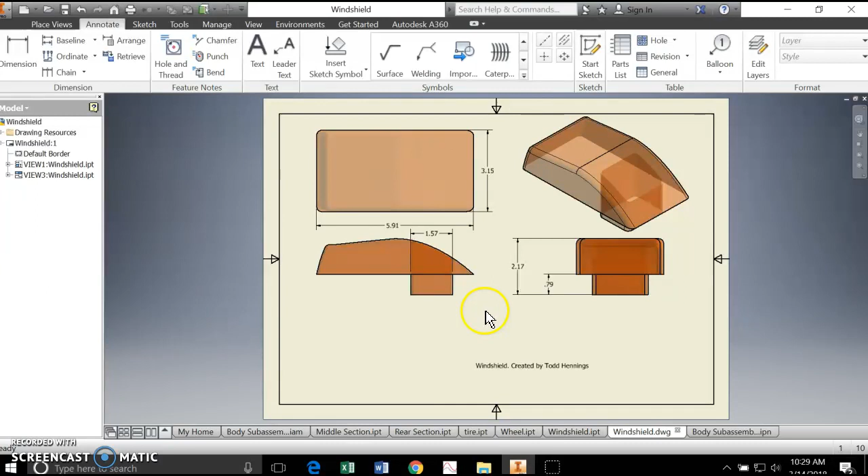All right, ladies and gents, a video for us to figure out how we're going to go ahead and make something that looks like this. This is an orthographic projection, but we're using for the first time in our class the drawing feature in Inventor. So let's figure out how we're going to do that.

You're going to produce an orthographic projection for one of the objects that you made. Maybe I'll model one of my passenger sections and show you how simple it is. So once the part is made and it's in our project file, we're going to choose for the first time the drawing. So I'm going to pull that up here.

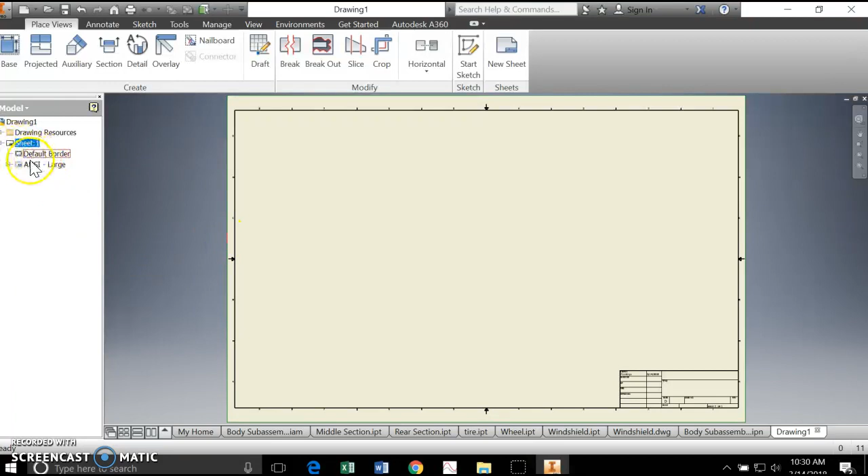We need to make a couple modifications, because a lot of times the way you'd print these out or display them would be for a big printer in different formats. So the first thing I'm going to do is turn it to a printable size sheet. I'll go ahead and delete the title block there, and we're going to put our own in there. The other thing is edit sheet, and I'm simply going to turn it from D to A, that's your standard printer paper. We hit OK, and it gives that.

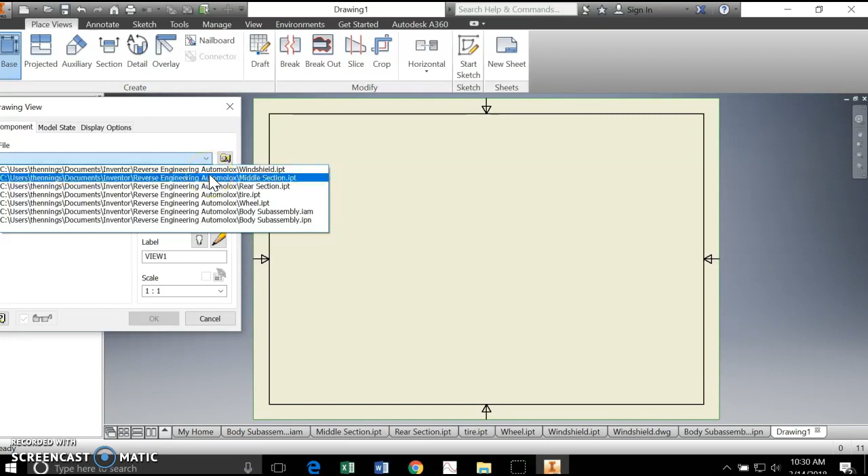Now the first thing I'm going to do is place my object that I'm going to make the orthographic projection of. Like I said, I want to use one of my passenger sections as an example. So I hit base, and down here this drop-down menu has all of the files I've made in that project folder — again, one of the reasons the project folder is so important. I'm going to go ahead and do the middle section, hit that, and it brings it right there.

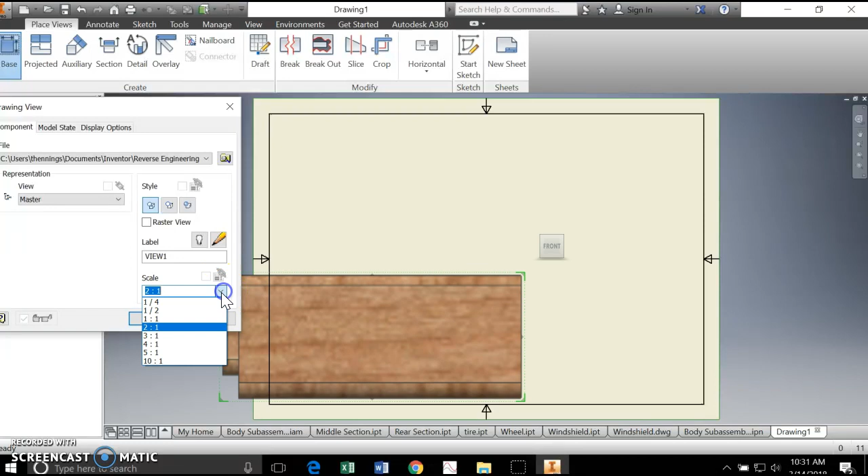I can move that around, but I don't need to move it around. Here, what if it seems too big or too small? I can change the scale in this case. So that's too big, right? That's too small, and you can set it manually — you can set different scales. I think 1:1 is going to be fine for this. So I'm going to hit OK.

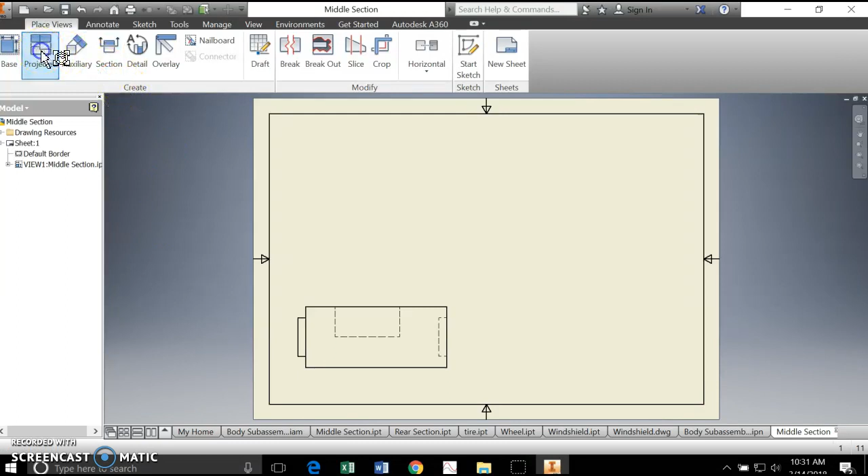Now here's the cool part of it. It changed the view, and we can make those look different in different ways, and we'll look at that in a moment. But we want to get the other views, right — the top, the isometric, and the side. Watch how simple it is. I'm going to hit projected and do this and move it up. So there's a top view, there's my isometric view, click, move it down, there's my side view — see how they're all aligned. Once I have them where I want, I'm going to right click and say create.

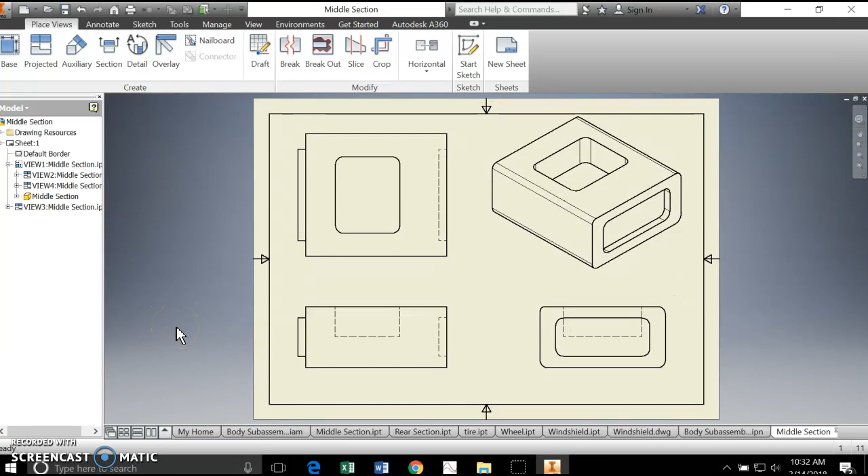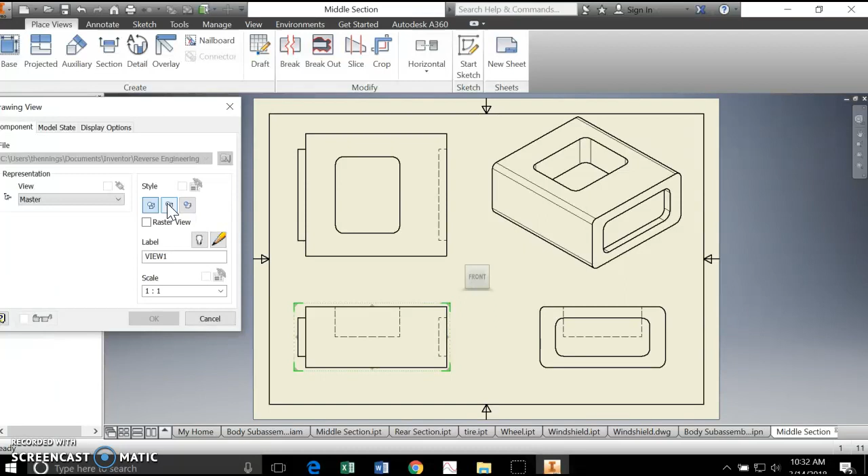So there they are. In this case, the view is sort of like a drawing. If we wanted a more realistic view, I could right click on my front view and look for edit view, and over here gives me some different options. Hidden lines — if I don't want the hidden lines to show, I'd select the one that says hidden lines removed. They're not too busy in this case, I don't think it's really detracting, but if you had a bunch of them it might be too hard to interpret, so I'll leave them there. This one says shaded, so I'll hit shaded and see what that does — it puts in that wood grain shape for us. I'm going to let you decide how you want to display yours.

I could do the same thing up here, edit view and shaded, okay, and it's going to produce that.

How will I know it's yours?

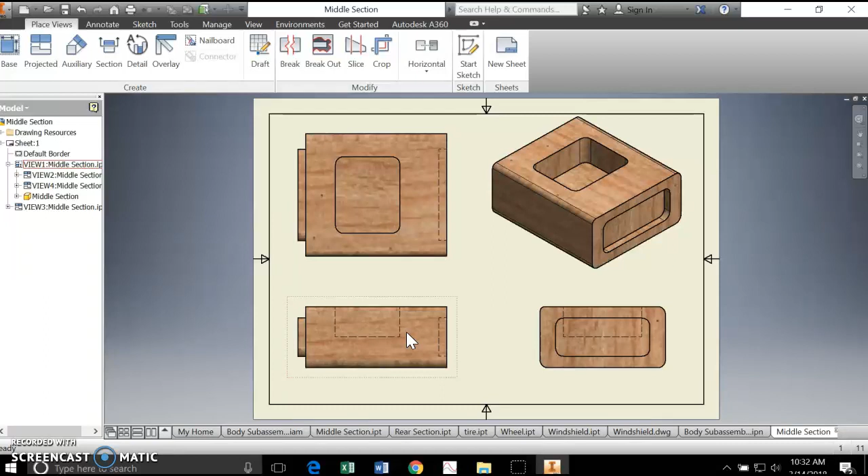We deleted the title block because it takes up a lot of room. We can customize that title block, but for right now I just want you to go ahead and use some text. So under Annotate, I'm going to hit text, and I want you to put something on that looks like this. I'm going to label the part.

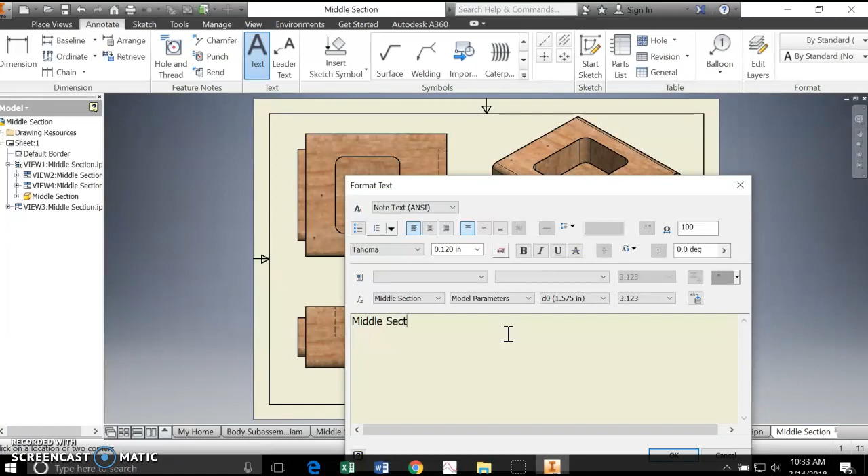And mine was an Automoblox. I forget the car, what was this one? C9? No, it's not C9. Anyway, I don't know, maybe it's T9. You figure out what yours is.

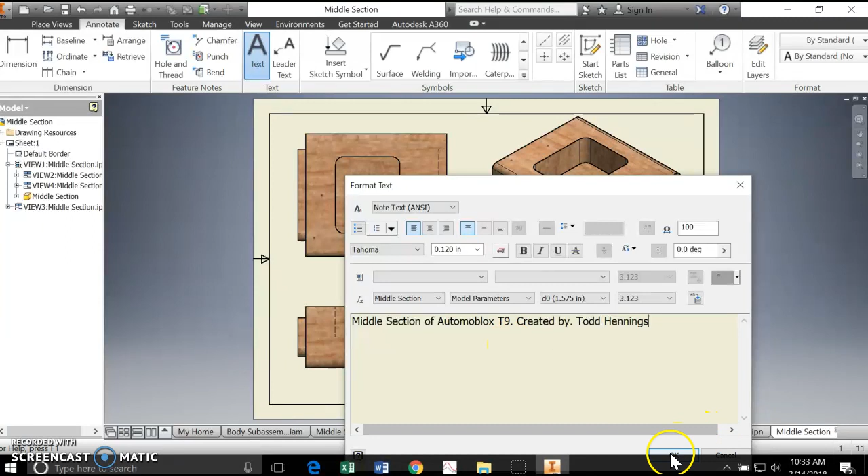And then I want you to also say who it was created by. And we'll hit there, all right. So again, we got a real quick one.

Now we're going to add a couple more things to it, though. I want to put some very basic dimensions so we figure out how to start using that tool. Remember, at the very beginning of the year, we learned the rules for dimensioning. So watch how simple it is.

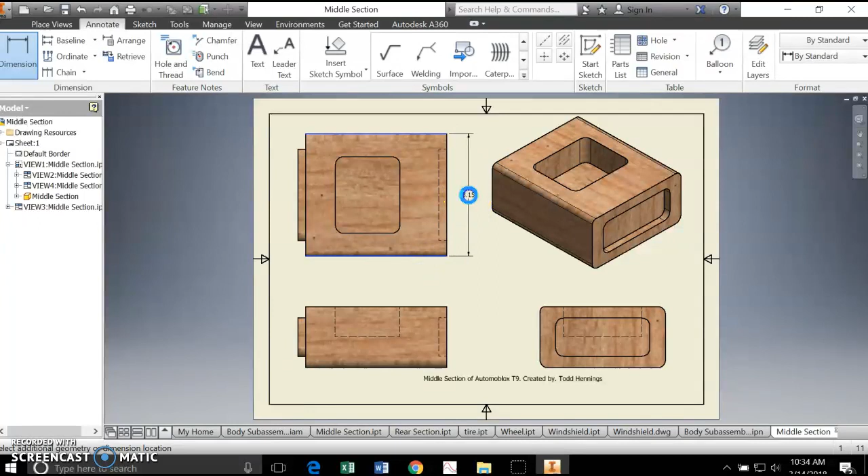We don't even have to go back to our drawings or anything like that. I'm going to hit dimension and just lay some out here. So this would be an important one for someone to know. Just click that. Mine's in inches, so 3.15. I'll hit OK for that.

What's another maybe important dimension that should be on here? Maybe I'll move this one. Cancel, it's kind of hard, you want to grab that guy. I keep doing the same thing. I'll leave it there, I'll show you. I want to pull that one out, and we can pull it out. I'm just not grabbing it right. I'll do another one here.

Dimension, what would be another one that might be appropriate? This one and this one to there. Okay, right. I could do here to here, but that's a hidden line. Remember, one of the rules is we typically don't dimension to hidden lines. So another dimension for this part, here to here.

I'll pull it down here instead of putting it up here, we try to avoid that. And what if another dimension we might put in this case, another one that's important, here to here. Hit OK. And then, of course, maybe here to here.

So again, this is not a tutorial on proper dimensioning and things like that. We'll get into more of these and the specifics in the next unit. I just want to show you how to use the tool. You should have the basic dimensions of these guys down.

Hit OK, I'm going to pull that one out a little bit. Maybe this is an important dimension too that I need to put on there. So I'll do it. Right, there it is. And again, all mine are in inches.

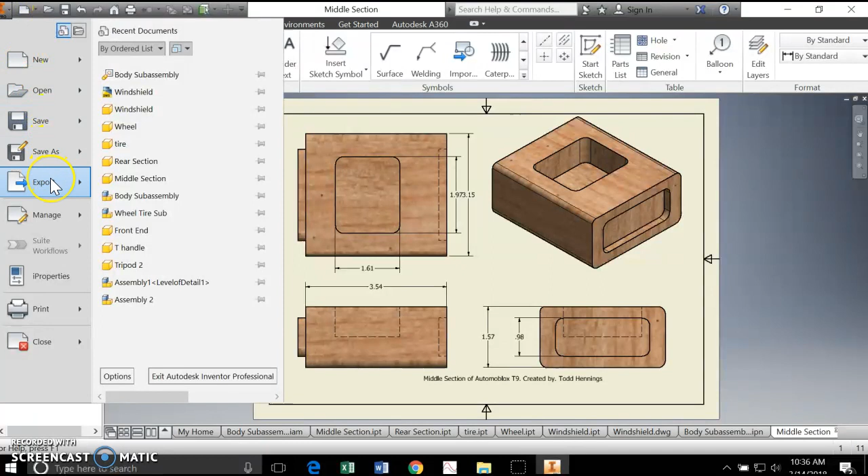Pretty simple. I'm going to go ahead and hit the Inventor icon. We're going to do export as PDF. And it gives it that one. It's going to automatically go into your project file that you should have set up. And I'll hit save.

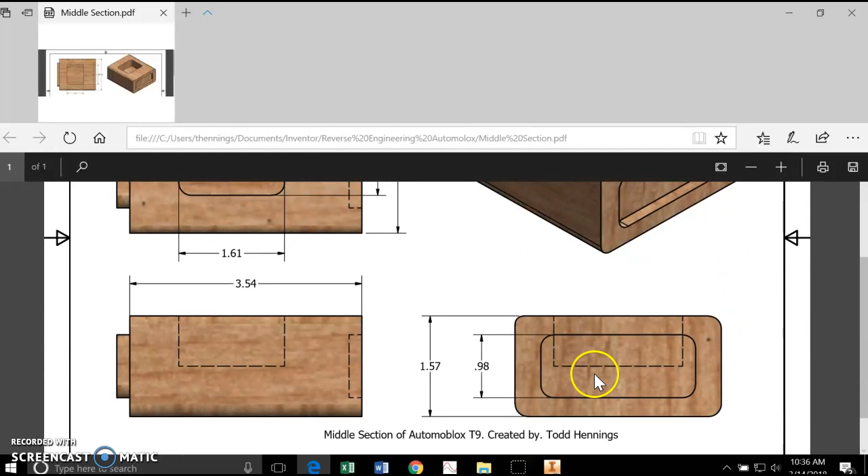And it brings it up on my computer. It may or may not on yours, but it should save that drawing as a simple PDF that you can email to me for credit for this part of the assignment into your project folder.